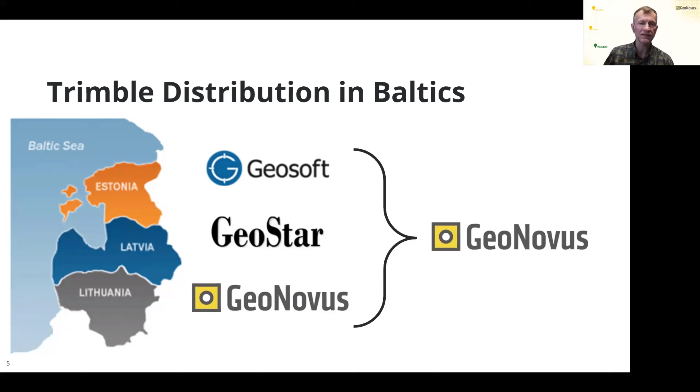And the next slide. Our main mission and role is to distribute and support customers related to the Trimble products, and many customers already know that the main products are GNSS receivers, total stations, classical optical, digital levels, various 3D scanning solutions like Trimble X9, which is used on a tripod, also MX60, which we can put on the train.

For example, Latvian railways are using that, or some mobile mapping solutions, which are also used in Baltics. So various 3D scanning solutions. About the monitoring solutions, we will be talking today, Christian will help with that. Photogrammetry solutions, also we have Trimble Business Center, Trimble UAS Master, some Pix4D products for that. Also drones, various UAS solutions.

And in all three countries, we have Trimble repair centers, if somebody needs help to adjust, to fix, to solve various issues for all Trimble products. So in all three countries, we have three repair centers. And if there is a need, we have various products for rental and can do some projects together with our customers.

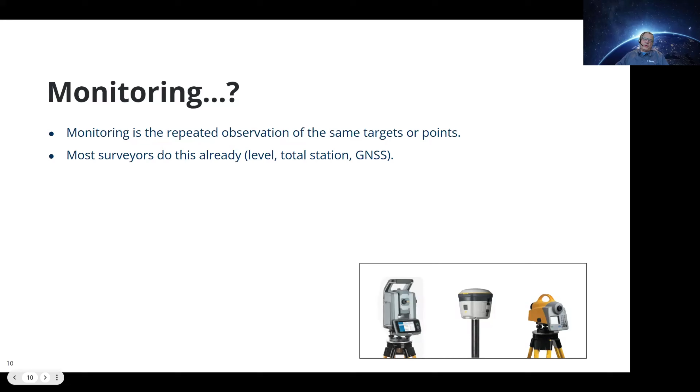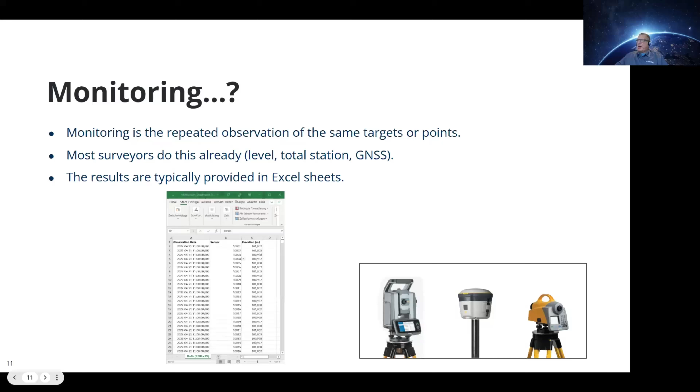I'm pretty sure that most people in the call have done some monitoring or deformation measurements in the past. Typically what you do is create the results of each observation and put it, for example, in an Excel spreadsheet. Then you show that spreadsheet, maybe add some graphs, and provide it to your clients. The good thing is that Trimble has a lot of tools, little ones and more complex ones, that allow you to make this whole workflow a lot easier.

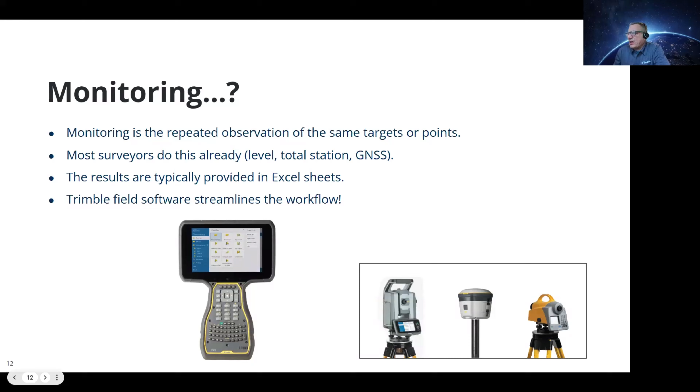That is what we are talking about. There's special field software tools that you can use, and special office software to streamline your workflows. Again, what I want to say is getting started with monitoring is very easy.

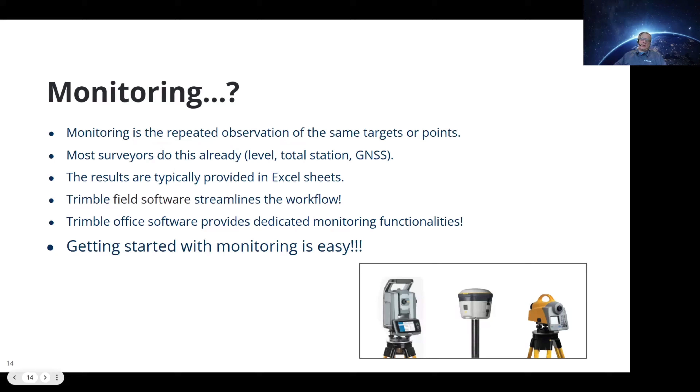While we are talking about standard survey equipment, I want to start with showing how to improve your workflows using a total station. But before that, we want to look into specific applications where monitoring is being used today. I don't want to do a deep dive into that, just to highlight where this technology can be applied. In the end, the idea is to provide you with new opportunities where you can provide your professional services to others.

When it comes to monitoring, immediately we are talking about monitoring of structures, in this case transportation infrastructure that can be rails, roads, or canals. You might have a canal or a dam where there are ship locks that you need to monitor - that's done frequently by our clients in other regions.

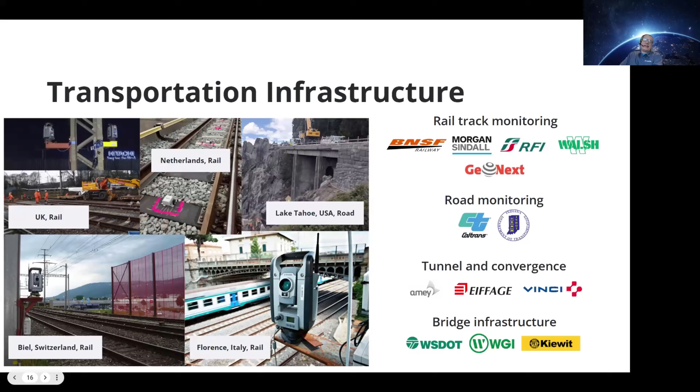Rail is a very hot topic because there are many infrastructure projects going on in Europe. There has been a plan for many years to connect the major cities in Europe with new railway lines, and mostly these new railway lines are being constructed in corridors that already exist, in parallel to existing railway lines. Then, of course, monitoring of the existing infrastructure is required.

Another thing is buildings. Whenever you have historic buildings, for example, and there is construction going on, you want to make sure that the historic buildings or other buildings adjacent to construction sites are safe. In many cases it's already today compulsory to set up a monitoring system.

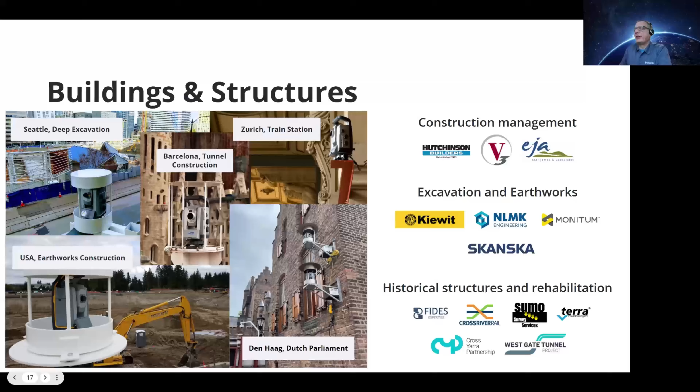Because in the end, when something happens and the construction is affecting buildings next to it, you need to prove: is the damage related to the construction, or was it there before? And what is the extent of the movement? Of course, it is a safety measure in case there is movement - then you can react, immediately say okay, stop working at that site, because now something is happening to the structures around it.

Another big topic, maybe less important in the Baltic region, is mining. There are a lot of open pit mines in the world using Trimble technology to monitor their pits, the pit walls, but also structures adjacent to pits, basically dams, because a lot of mines produce a lot of wastewater and store it in dams, which need to be monitored.

But other dams are also monitored - at least a dam of a certain size that is a potential hazard to people living next to it has to be monitored. I'm pretty sure most dams in the world already have some basic monitoring systems - you do level runs on the dam crest once or twice a year, when the water level is high or low, so a summer observation and a winter observation. But there are also other sensors in the dam itself used to monitor, and we can help modernize these existing installations, because most dams in Europe are pretty old. They have basic monitoring systems, but with today's technology, they can easily be automated and extended.

All right, using our survey equipment for monitoring applications. As I said, I'm pretty sure a lot of people have already been doing this, and that is why I would start with an example which is very basic, but nevertheless important. Let's start with manual data collection, and let's assume you have your total station, and you already have a field controller of some sort - this could be the TSC7 or any other controller running the Trimble Access survey software.

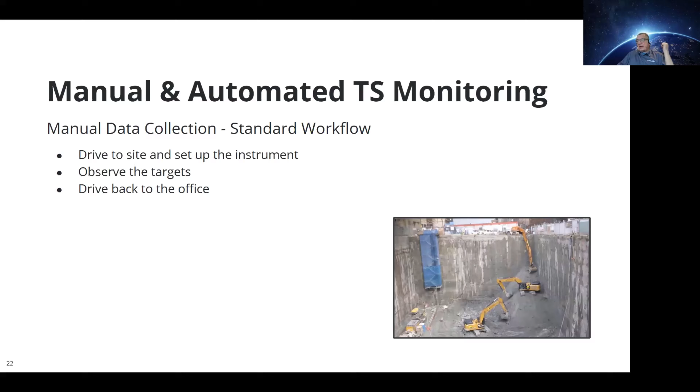So what can you do by using the technology that you already have in your hands today? What you would do is drive to the site, set up your instrument, and once it is set up, observe the targets. Once you've observed the targets, you go back to the office to process the data or use the results, create that famous Excel sheet that I mentioned initially, and once that's done, you maybe dress it up a bit by adding some graphs - Excel has these capabilities - and once you've done so, you provide these results to your client. After some time, you go back to the site and repeat the same story again and again.

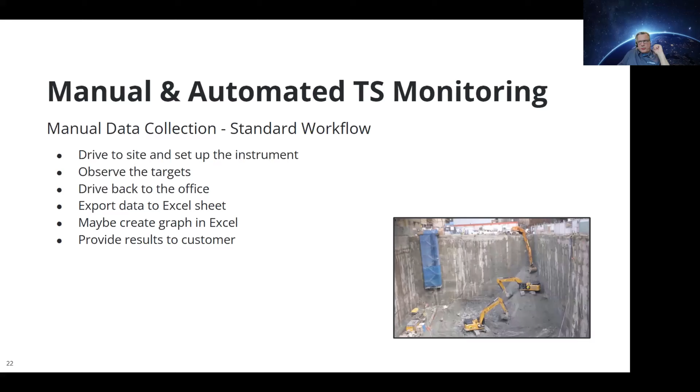So that is a standard workflow, and if you just need to do this once a week or once every second week, that is a proper workflow - you don't need an automated system for every single site. But what you can do is still improve the workflow on site with little tools, and one little tool is the so-called Trimble Access monitoring application. It's a little add-on that you can put on your controller, an add-on to the Trimble Access survey software, and that little tool improves the workflow on site already a lot.

Of course, you still need to drive to the site and set up the instrument. That will always be the case. But then the instrument observes all targets automatically, you don't need to do this manually. Once you have observed all the targets in the field directly, you can create the report on it. You can output the values, and you can output graphs

for the movement over the observed periods. And then you can immediately in the field provide these reports to your client in a PDF, in an Excel sheet, or even in a Word document if you want to do so. And then, of course, you can go easily and go to the next site, do your next job. That is a pretty straightforward workflow, and it reduces the amount of time on site.

If you have multiple jobs, or if this is a long-term project, or if you want to bring in observations from other instruments, you can also use a little add-on which is made for the Trimble Business Center software. I think most or many of you are already using Trimble Business Center for your standard survey work. There's also a little tool available, a little add-on, a module available for TBC that allows you handling monitoring data in a very easy way.

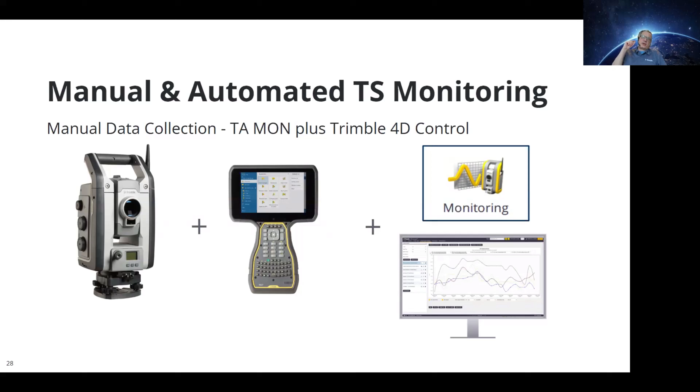But how does that now change the workflow on site? You still, of course, need to go to the site and set up the instrument, observe the targets. You sync the data with the office, but then, the Trimble 4D control software manages the data. It will process the data automatically, it will automatically create the reports, and it will provide the results to your client.

T4D, I will show you in a minute, can create reports automatically according to a schedule that you set up, but also it provides a web user interface that you can share with your clients. So if you want your client to look at the data by himself, you can set up access for your client, and you don't even need to send the reports, because every time when the client wants to see an updated result, he can go and check that result by himself.

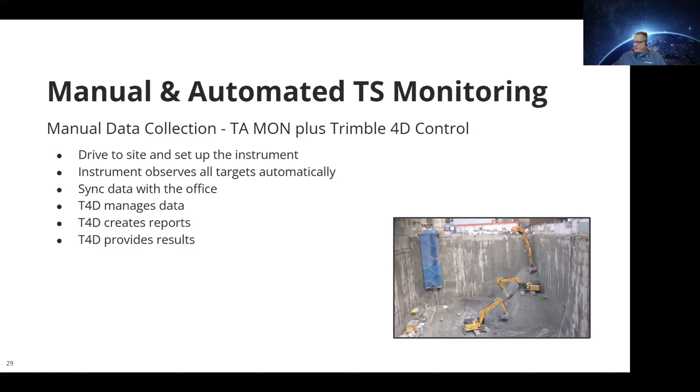Okay, now we have been looking at manual data collection, and I don't think that is a big problem for anyone here on the call. But let's assume you now see that there is movement, and you need to increase the observation frequency. Then it makes sense to automate the system.

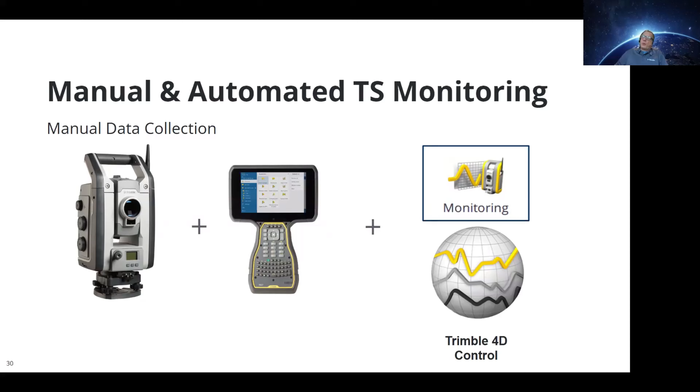What it does first is operate the instrument autonomously. You can use that device to set up a schedule for your observations, and according to the schedule you set up, the instrument will observe the targets.

The observations will be transferred directly to the Trimble 4D Control monitoring software. If there is an interruption in the internet connection, since this works via internet, the data will be stored locally, and once the connection is back, the Trimble 4D Control software will pick up the data and reprocess it subsequently, so you don't have any gaps in your monitoring data.

It also provides power to the instrument, so you just need one power supply, either mains or car battery charged by solar, or whatever power supply you have available. There's just one cable that goes from that box to the total station. It also checks the total station to see whether it's operating properly, and it will give you information that everything is all right, or it will send an alarm if something is happening.

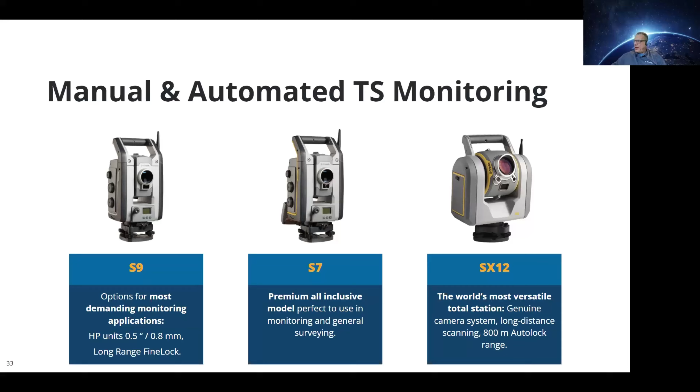All right, there is also an example here that Maris wants to talk about—an installation in Latvia. So please go ahead and explain that project.

It's equipped with an S9 high precision total station, Settop M1, and it observes every hour, 4 times each of the targets. That means 6 reference points and 16 observation points. Data transmission and real-time accuracy is around 1 millimeter, and it has worked now more than 2 years in the field.

Yeah, this is the first installation and it works quite successfully. Okay, thank you for this.

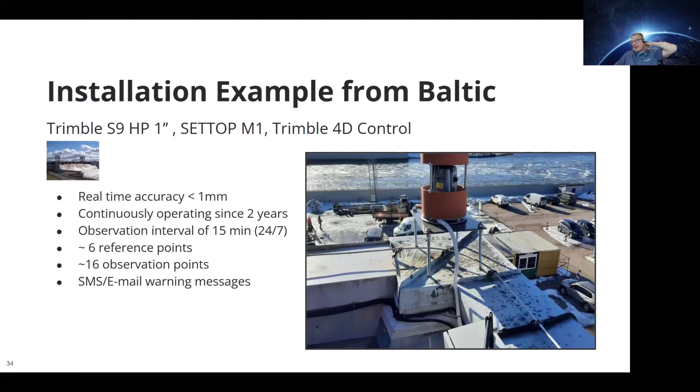The client is very happy with that installation, and because of that, he's now considering adding additional sensors, additional devices to monitor additional parts of that structure. When we talk about additional monitoring sensors, we can immediately think of the sensors we're familiar with, and when talking about additional survey sensors, of course we first look at GNSS.

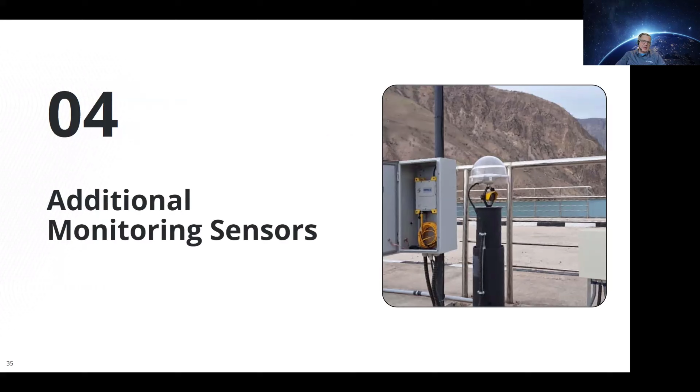GNSS brings a lot of advantages to a monitoring site, because with GNSS it's possible to monitor at very high frequency. Maris just said in that monitoring project in Latvia, we are observing the targets every 15 minutes. With GNSS, as you can imagine, we can create much higher frequencies. We can have, for example, a result every second. If we have a more dynamic application where we expect sudden movement, then GNSS technology is the right choice here.

Of course, the drawback is that you cannot observe so many targets with a single setup. You need multiple receivers, and in order to observe multiple points, you need the equivalent amount of receivers.

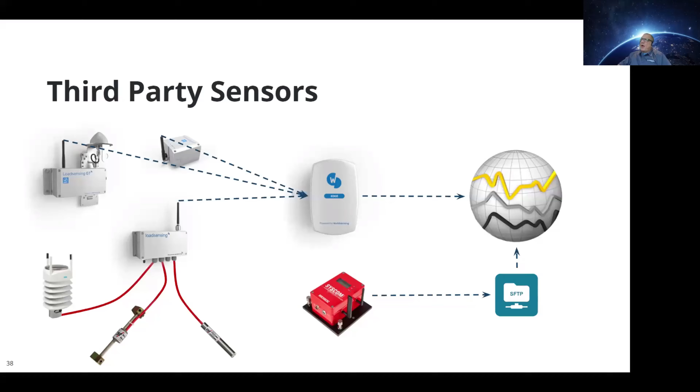Here's another example from the Baltics. This story is also available on our partner Worldsensing's website. Maris, do you want to add some comments on that one?

Okay, this is one example of how to use these sensors in reality. As you see, this is Gediminas Tower and some landslides at this object.

What I'd like to explain a little bit more about these sensors - it is first necessary to study in detail what you really need, what accuracy is requested. Some sensors give you very good relative accuracy, but sometimes for these geotechnical sensors there's some drift of the zero point, and it needs a long time to recognize this movement of the zero point, at what scale, and what is affected by temperature, pressure, sunshine, or climatic periods. This is necessary to study.

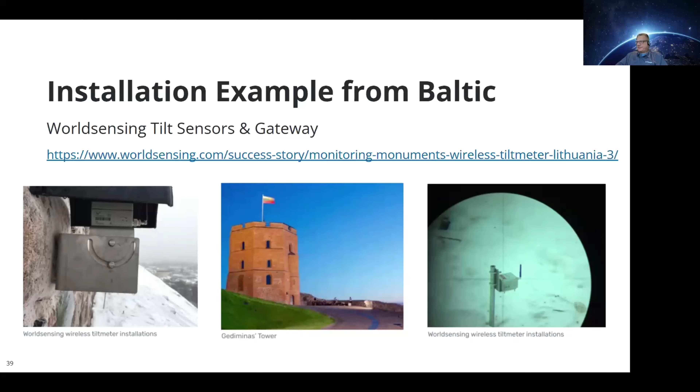Okay, accessories. We talked about housing, we talked about protection for the instrument and so on. Of course, we have a whole bunch of accessories which you can use for setting up a monitoring system.

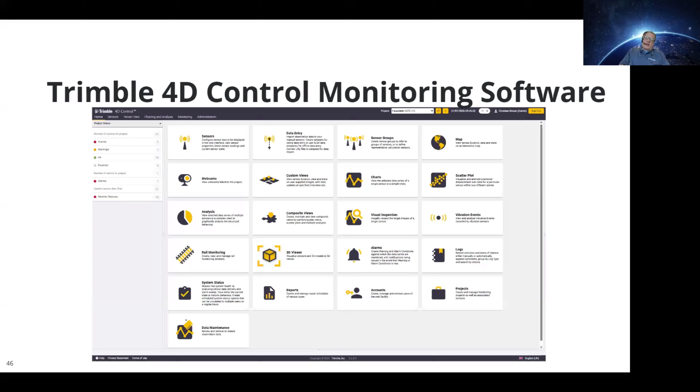Of course, you have a section that allows you to do account management because you can actually grant access to others, but you want to make sure that these people only see what you want them to see. So you can create very specific accounts and access levels to this.

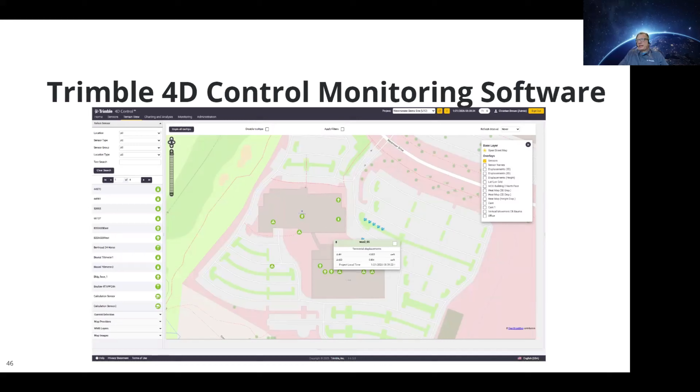Naturally, you would expect a map view, of course. So you can by default use OpenStreetMap, and if you have an account for Google, a key for Google or Bing or so, you can also use Bing and Google Maps. You can also create your own geo-referenced maps, load them into the software and use your geo-referenced pictures as a backdrop image. You can even bring in your own web map server. Many authorities have their own maps, cadastral maps or maps of many different sorts, where you can access, and then you can integrate that map server also here.

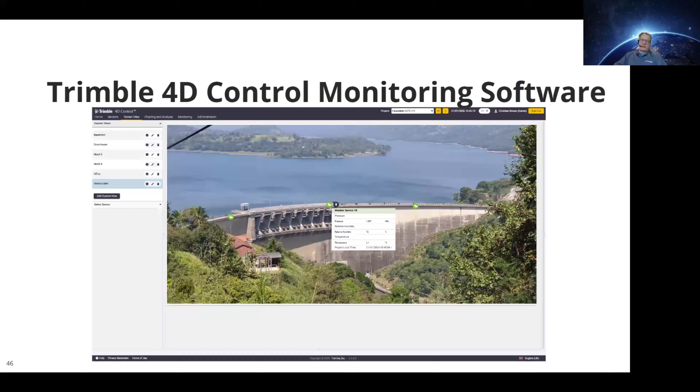You can also simply take a picture with your mobile phone that shows the site, and then you move the sensors to the location so that others can see the position in the real world, and you can overlay the readings of the sensors and graphing and so on. You can create your own dashboard by putting different graphs together on one page, and make this dashboard accessible to others without creating an account. You can publish it to the outside world, in front of the web UI login. Visualizing the data is also a personal thing - some people prefer to see the data in this way or that way.

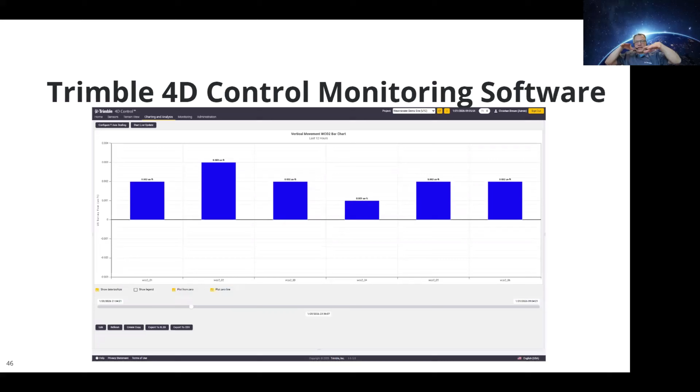Yeah, this is an example of a bar chart where you can monitor the different height changes at points that you have been leveling, for example.

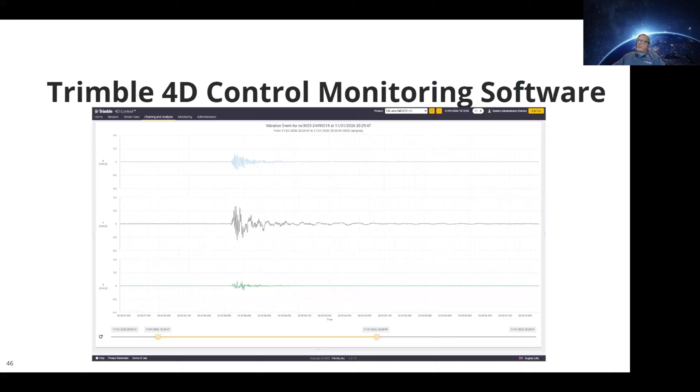Vibration data can be visualized and analyzed in a specific vibration event section. You can use live webcams and overlay it with the sensor position. As I mentioned, you can also bring in 3D models, rotate them, and see the sensor position and the movement vectors, for example.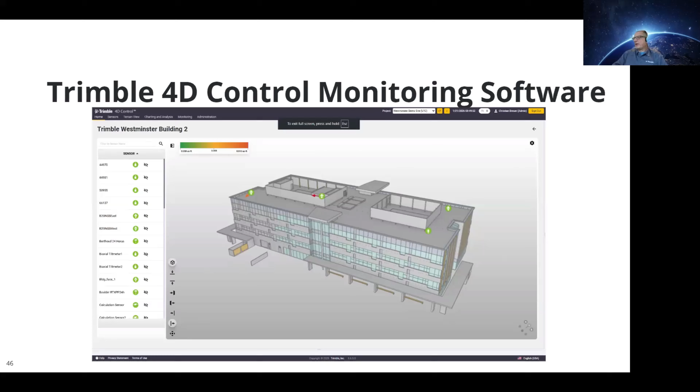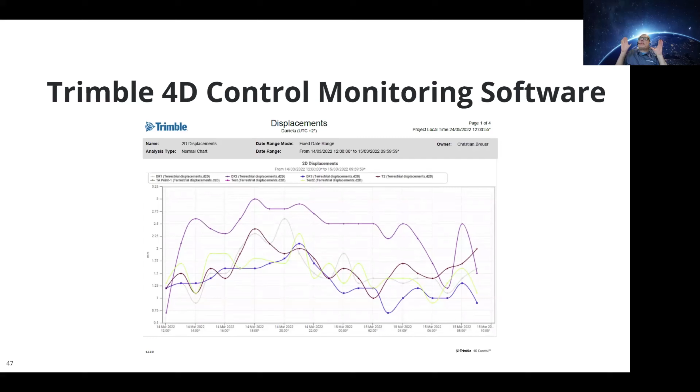And which is, for 90% of the users, the most important stuff: you can set up automated reporting. So that every Monday morning at 9 o'clock, for example, you get an automated email with a PDF file that gives you an overview of what happened during the course of the week, a chart that shows the behavior of the sensors and the structure over the last week, and you don't even need to touch it if you want to.

And worth mentioning here is one thing for Trimble 4D Control: you can also have a dedicated rail module. Why is that? Number one, there are a lot of railway projects going on. There is a lot of construction going on on existing railways, and many of our installations are being used to monitor rail tracks.

A total station or a tilt sensor will provide you displacement, tilt, or inclination of the rails. But most of the survey authorities are not interested in 3D displacement of a rail. They want to see the results relative to the actual railway geometry.

And this T4D rail module allows you to upload a file which contains the railway geometry, and then when you observe the targets on the rails, or if you bring in a tilt sensor and place it on the rail, it will automatically calculate the values required by the rail authorities. Meaning it will take the rail geometry and calculate all these values you can see.

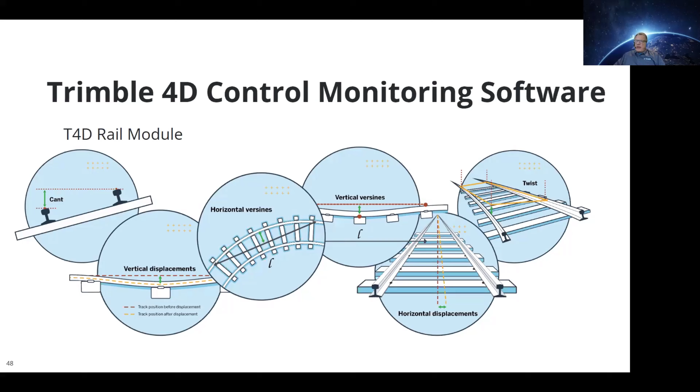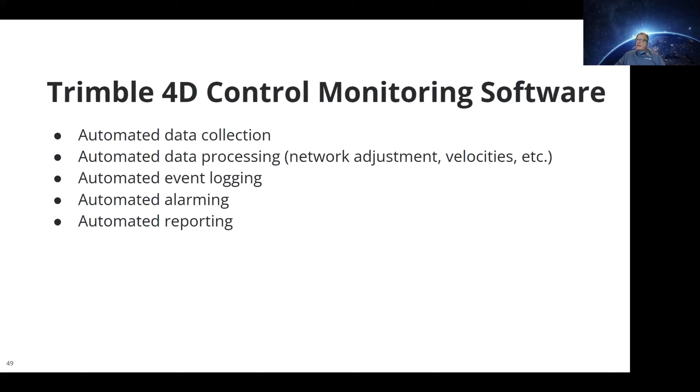Having said that, I think that was one of my last slides. That is actually the one just summarizing the capabilities of T4D. So if you want to, it can do everything automatically. If you want to work with it and bring in manual data, no problem at all. The big benefit is that you can provide the data to your clients immediately, and you are always up to date. Having said that, thanks a lot.